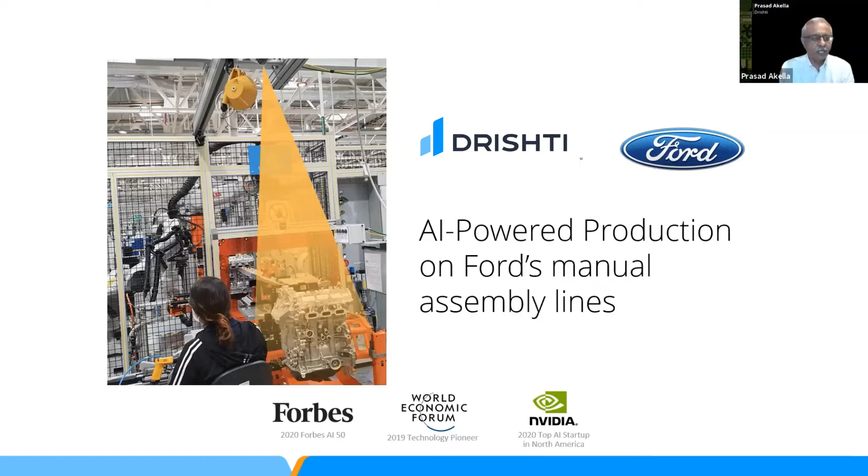So today, I'll dig into AI-powered production on Ford's lines in Mexico. My host and executive sponsor, Dragos, actually is on the line with us, so I'm thrilled to have him here. And I'd like to give you a live example of a practical, scalable AI system that Bill spoke about in his introduction, about making AI systems that work with people that Nishita spoke about, and about shifting the productivity curve that Stephen referenced. So without much ado, let's jump in and see what's going on here.

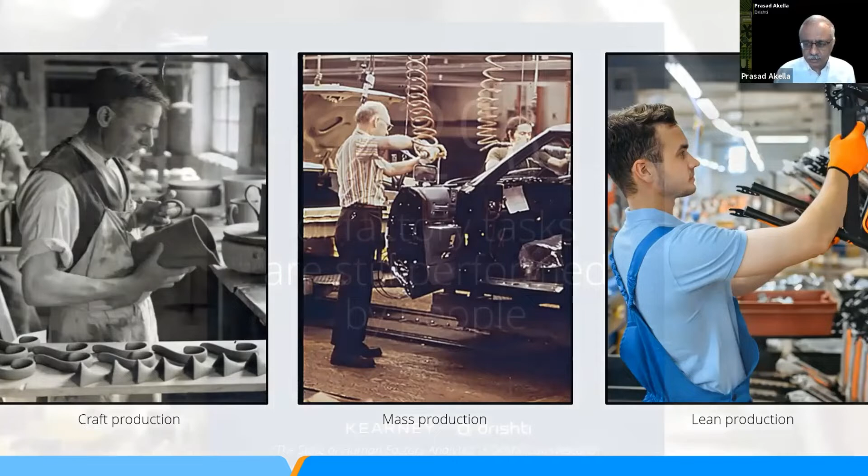So first, let's look at the last 100 years of manufacturing. As we've gone through these 3 eras of manufacturing, Henry Ford took us from craft production to mass production, and Taiichi Ohno took us from mass to lean or Toyota production system. But the interesting thing over all of these 100 years, as you'll see in the next slide, is that surprisingly, a few things haven't changed. The first is the significant presence of people on the plant floor. Fully 72% of factory activities are still performed by people.

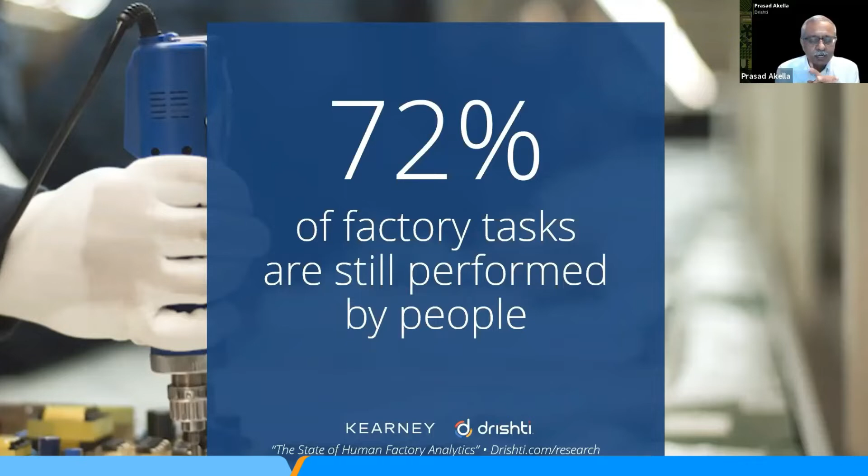The second is the absence of measurement techniques that can work at scale. Because the current processes, think of the industrial engineer, I think Stephen said he started out life in that role, with a stopwatch, are just too labor intensive and are fundamentally biased. And third, if you look at the world of robots and cobots and AI, despite having all of this, we cannot answer 3 basic questions: what just happened? What's happening now? And how do we improve what comes next? This temporal view of things on the plant floor.

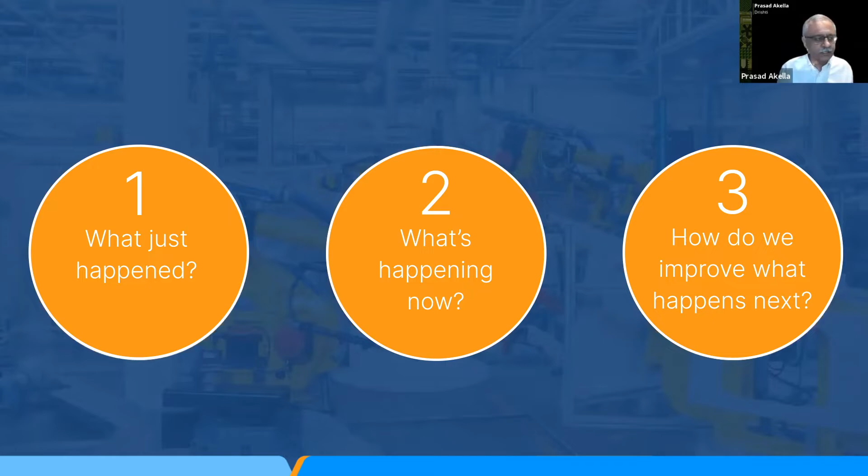So what I'm going to show you today, for the first time using Ford's data at an OEM, is how Ford is answering these questions, thanks, of course, to Drishti's AI-powered action recognition technology, which makes it possible to gather this data and answer these questions. So first, a little context on the infrastructure. As I previously stated, we are a video analytics and video traceability company. So the video camera is central to gathering data, creating this AI-powered production that we talk about, and delivering value both to the business and to the operators in the line. And we'll talk more about that here.

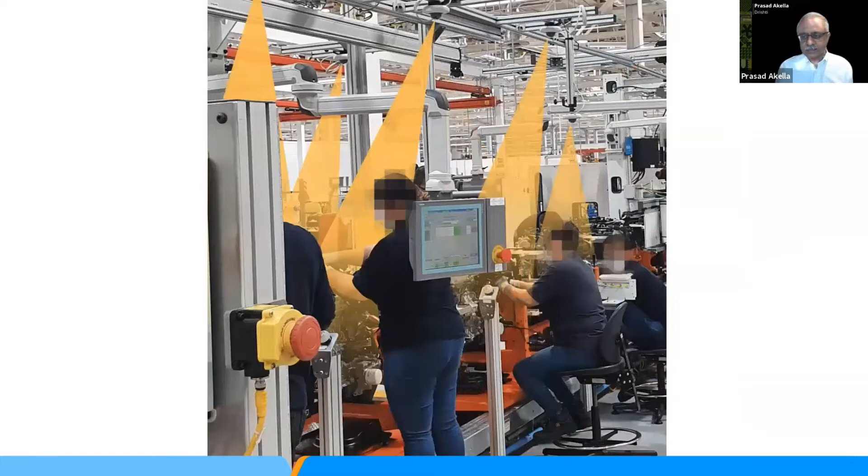So what this means is that we place a camera on every station on the line, and we do this to monitor the process, not the people. These cameras continuously capture video information that enables complete video traceability. You want to know what happened to a part, you can find out later. Our AI parses this video to identify key manufacturing processes and to identify critical process steps in near real time. This combination of AI and video data is what's transformative for manufacturers.

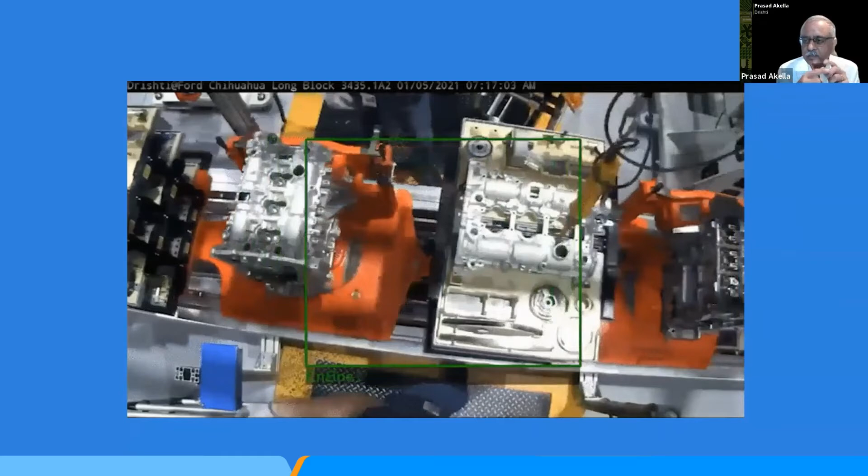So let's bring this to life at Ford's Chihuahua engine plant, where they make the Dragon engines. What you're seeing here is the Drishti system running on a line of 40 plus stations in this engine plant. And in particular, you're seeing the video of the line through the eyes of the Drishti camera. Now you can see that in the middle there, our AI system is continuously measuring cycle time, every cycle, every unit, all day long. And we're doing this live, round tripping to the cloud and back using our AI.

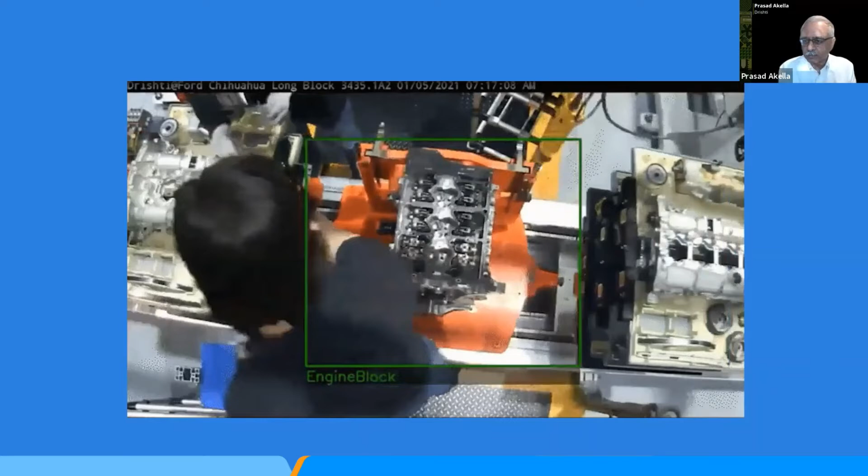Now I'm sure you're probably saying, oh, Ford could already gather a rough picture of what's going on from a cycle time perspective on the plant floor using other sensors. But the challenge that they've got, and what they cannot answer, is where is the bottleneck and why? Where do I focus my resources to improve the throughput, train people, change the process, better material feed, as well as what are the sources of the cycle time variability that's causing me to have issues?

Now, if you worked in the world of computer vision, you know that computer vision and AI are notoriously sensitive to changing environmental conditions. And manufacturing is a very dynamic environment. So the demands on Drishti's breakthrough action recognition technology are significant.

We've got to be robust to variations in size, locations of parts on the floor, people working differently, cameras being blocked, lighting conditions changing, the color of my skin and clothes being different than the next operator coming on the line. We've got to do the inference in a very short period of time to make this happen in real time. And we've got to do this within the margins of manufacturing economics. Manufacturing is very cost conscious, as we all know.

So what you just saw on the Ford line is a practical, vertically integrated AI solution that addresses all of these issues, as Bill talked about in his 2021 Tech Trends a few minutes ago. Now that we know what the infrastructure does, let's go back to Ford to the 3 questions that need to be answered and how Drishti helps make this happen. Let's start with the first question. What just happened?

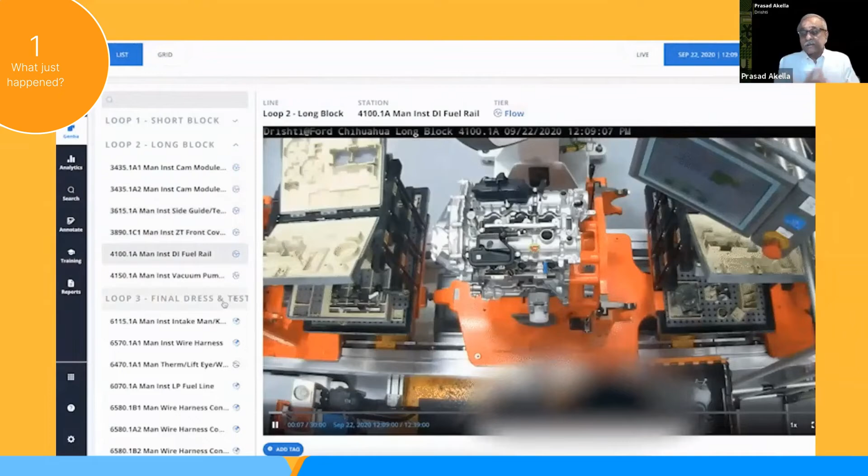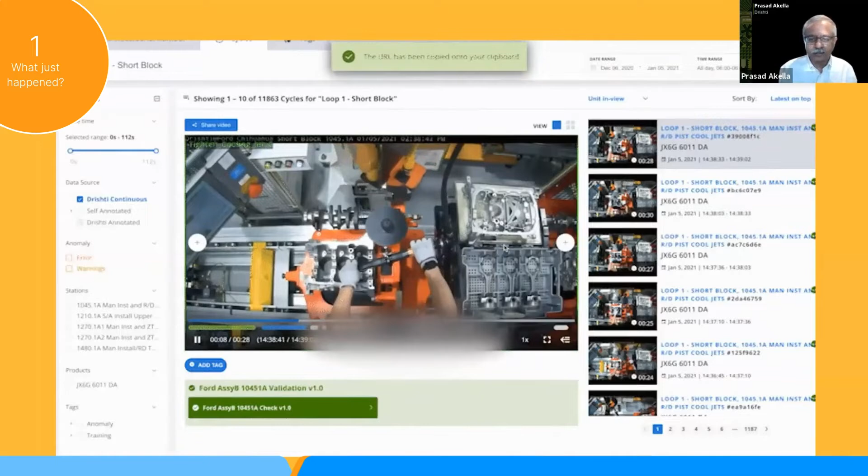Normally in a factory environment, if you want to understand why something went wrong, you got to send an army of engineers to perform intense, manual investigations, the root cause analysis. With Drishti, it's actually very simple. Want to see what happened to unit with serial number 12345, Tuesday at 3:18? It is a quick search for the video like you would do on YouTube.

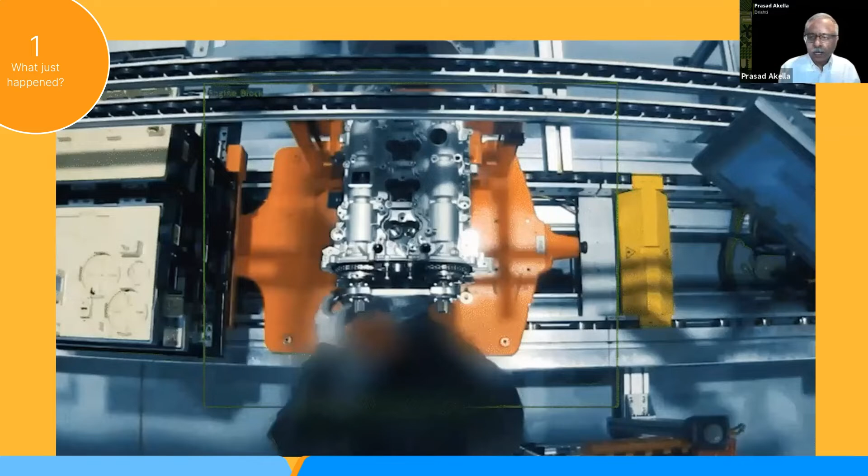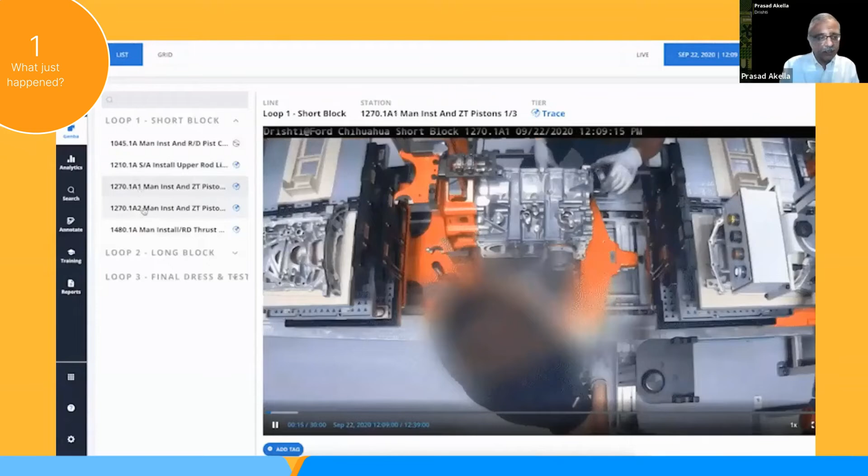And once you got the video and you studied it, you can forward it to the training team, or you can build a time study on top of it, or you can share the video with your engineers back in headquarters so the team can collectively troubleshoot. Now with Drishti, the root cause analysis, the quality and training improvements that have typically taken our customers days and weeks, and sometimes never possible, now just take a few minutes.

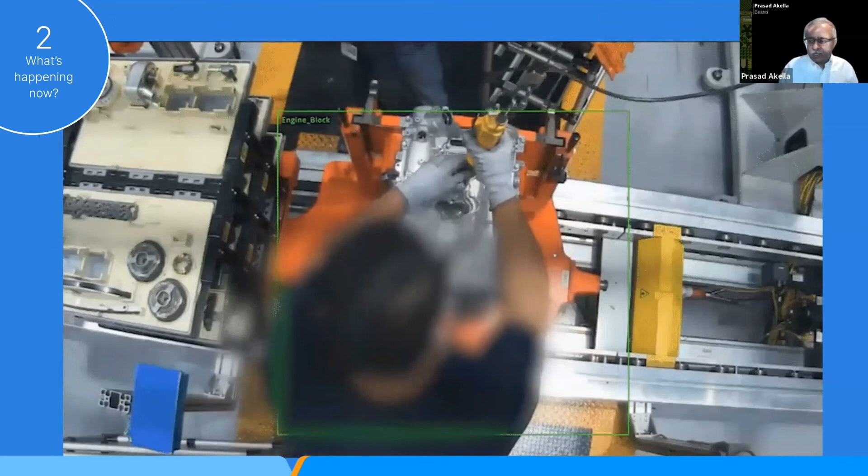Now let's go to the second question. What's happening now? One of Ford's goals is to understand bottlenecks on this line, as the bottleneck station controls the throughput of the entire line and controls the finances of the factory. Knowing where these bottlenecks are is critical to get ahead of any slowdowns. And of course, the longer the line, the problem is significantly harder. It's a compounded problem. So here's where AI comes in.

Since we're measuring the cycle time for every unit on every station, when a slowdown occurs, we can provide the Ford team the data backed by video so they know where the issue is. They also know what the statistical characteristics of the bottleneck station are. And now they can solve this problem with hard facts available to them. Factories have never had this visibility into manual activities ever before.

And let's talk about the third question. How do we improve what comes next? Today, if Ford wants to improve a line, they've got to send their engineers to the line to spend hours gathering data with a stopwatch. Not so with Drishti. One, we deliver the data so that Ford's industrial engineers can focus on problem solving with significant data to guide them.

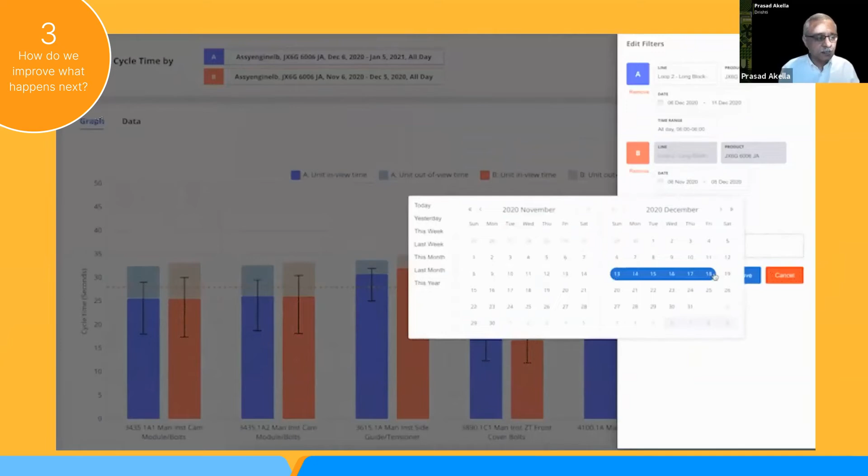Two, we empower them to rapidly make changes and determine the impacts of these changes within a day. So for the first time, you can do rapid A/B testing at scale on the factory floor. Imagine your line supervisors making small changes, continuously optimizing their systems, not having to wait for the industrial engineer to show up once in a quarter. Change happens dramatically faster now.

Now, all that I've talked about is from the perspective of the business, from the CEO or the CFO's perspective. So let's look at it from the perspective of the line associate, the 345 million of them who work around the world. The first thing to know is that unlike the vast majority of Industry 4.0 investments, Drishti augments and empowers these line associates. We empower them. We don't replace them. Empowered workers are happier. They do a better job. They're less likely to leave, and they help drive the business with insights from the front line.

This is what Taiichi Ohno and the Toyota Production System realized. They know the best. And specifically, Drishti's data empowers these line associates in multiple ways. It provides a record of truth, a method of improving the value they create, a tool for learning and training, and will soon be able to help them improve their health and safety.

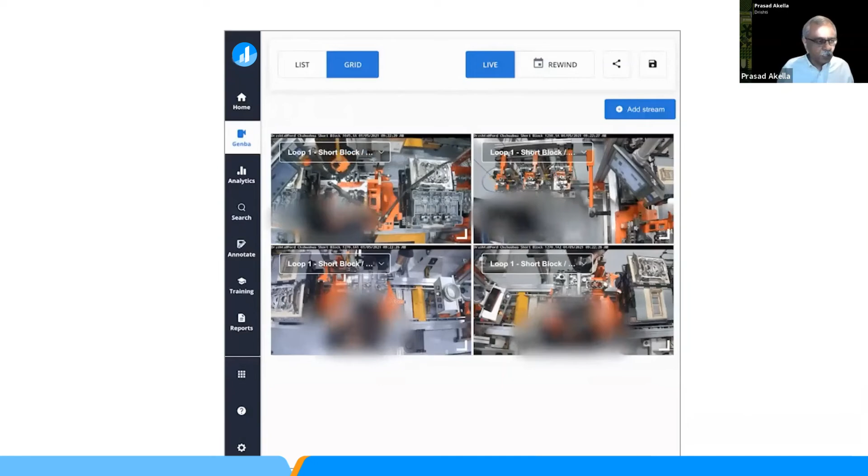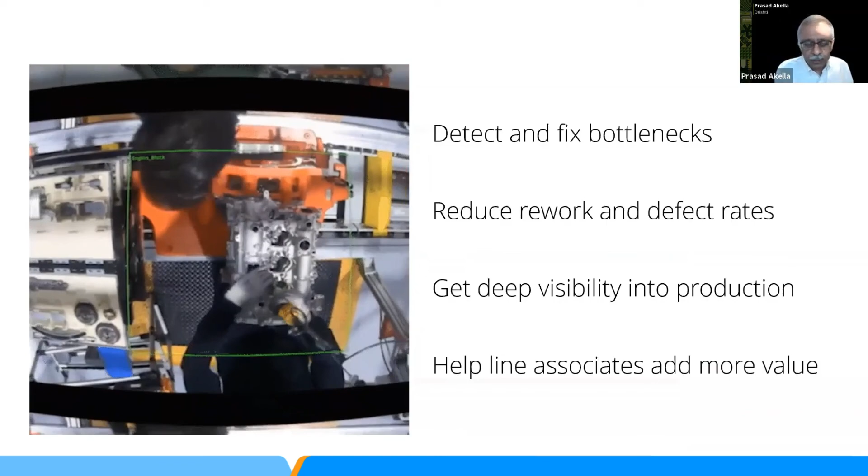So what happens when Ford can answer these three questions? Employees from around the world can see what's happening on floors around the world. Essentially, we're driving deep visibility. They can detect and fix bottleneck issues to improve productivity. They can reduce rework and defect rates to improve quality. And we can help these line associates add more value while being safe.

So in conclusion, Drishti is an AI technology that helps both manufacturers and their employees. And in so doing, we're ushering in a whole new era of manufacturing, what we call AI-powered production. And we are shifting the productivity curve that Stephen spoke about.